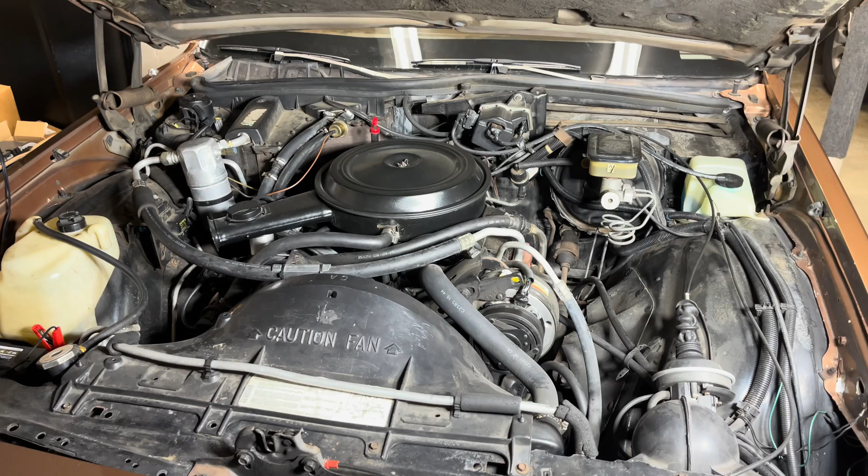Someone wants an overview and a walkthrough of the engine bay. This is our 1985 Caprice Classic, the small block V8 carbureted, the 305 V8 with the E4ME carburetor.

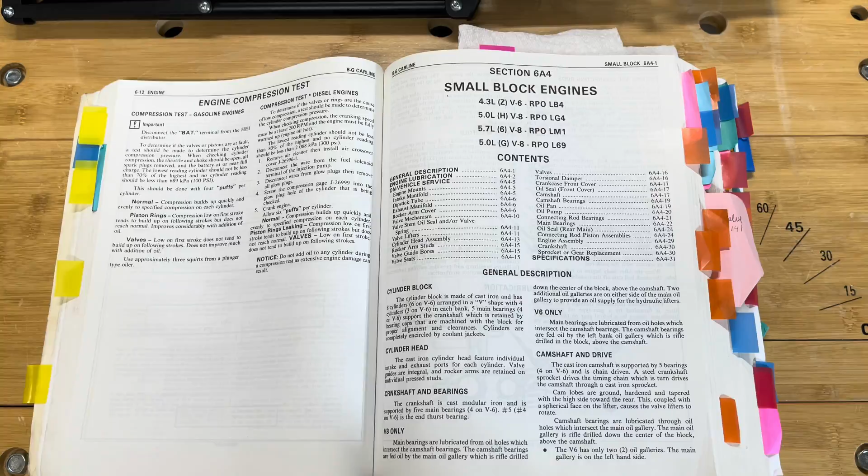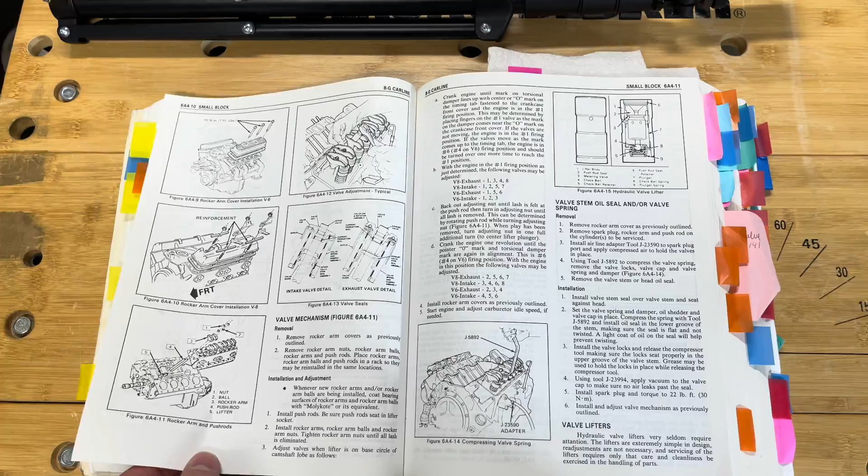I'll do a little walkthrough back and forth with the shop manual. The shop manual for the small block engine section shows the 4 engines available, and gives the general description of the mechanical arrangement, connections of the cylinders, the valves, and so on. If you have the diesel version of the engine, that's covered in a separate section.

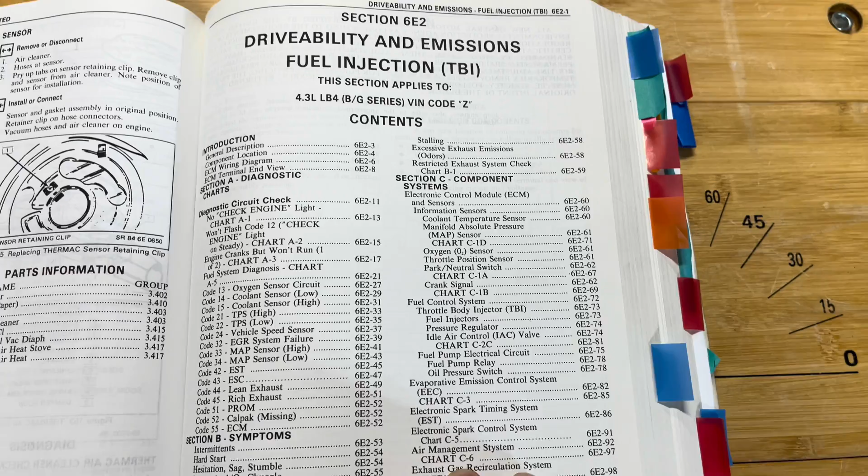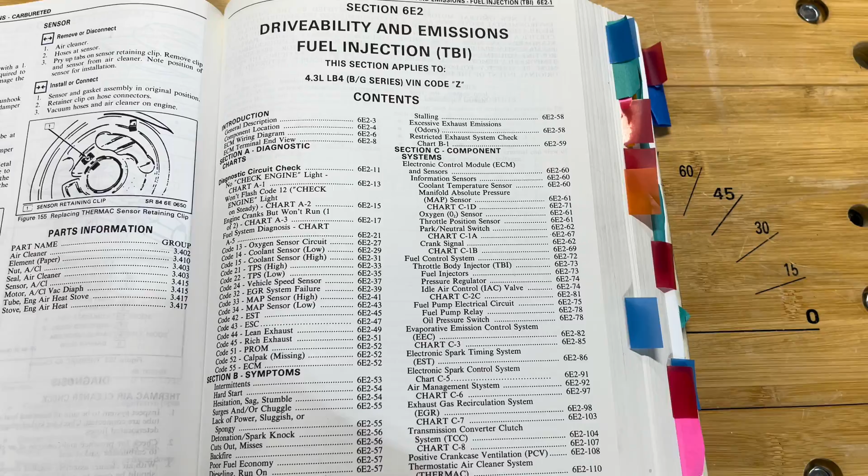There's a whole other section for the driveability and emissions for the throttle body injection, the early fuel injection version of the engine for the V6. I'm not going to cover that because that's not what's on my car.

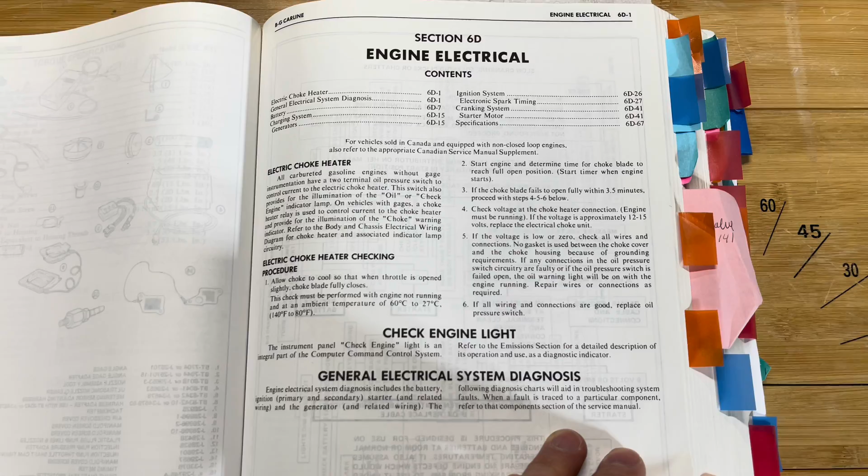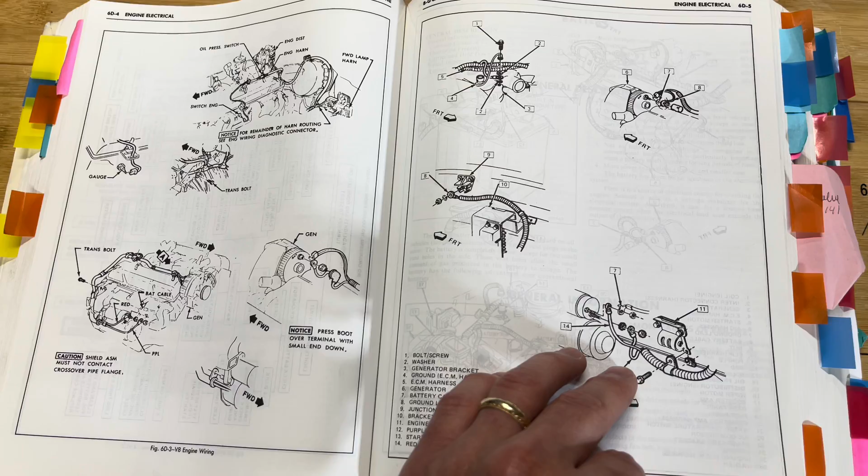Engine electrical can get tricky too, especially if you're trying to restore something and don't know what other people have done to modify it. There's a whole section on diagnosis of electrical problems for the engine, and some crude drawings of where all the wires and wire harnesses go. We'll take a look at this in comparison to our actual engine bay.

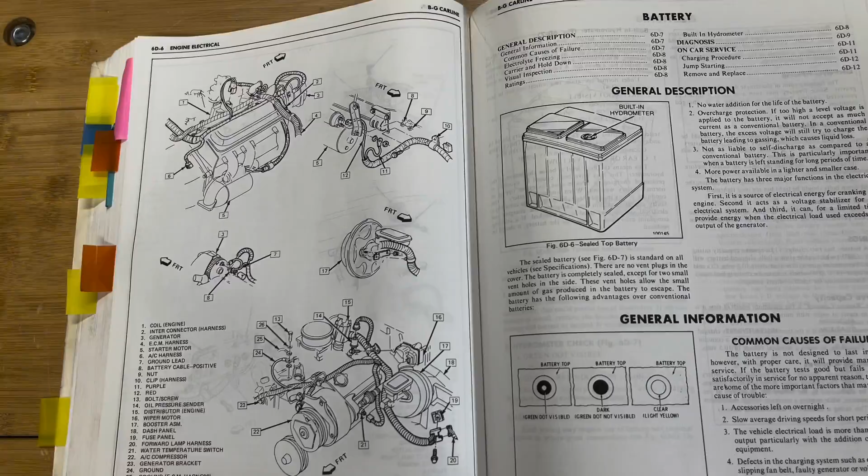To help us look at some of the wiring, I'm going to take off the air filter housing and flip it forward, exposing the carburetor here.

You can see the distributor back there. We'll do a very high-level overview because I don't know all the terminology for these parts, and honestly I have to rely on the shop manual whenever I need to do anything substantial. So let's have a look.

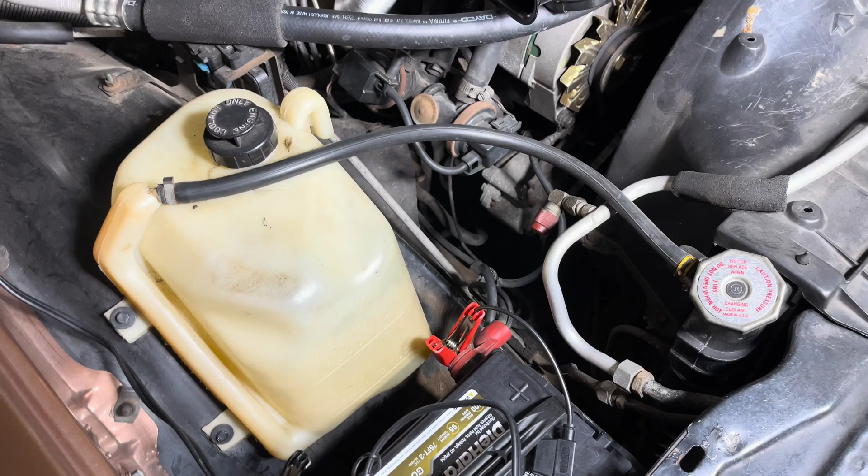I'll start over here by the battery. You can follow the connector to ground and over to the alternator and so on. I've got the wires here from the battery, and they connect in right down here.

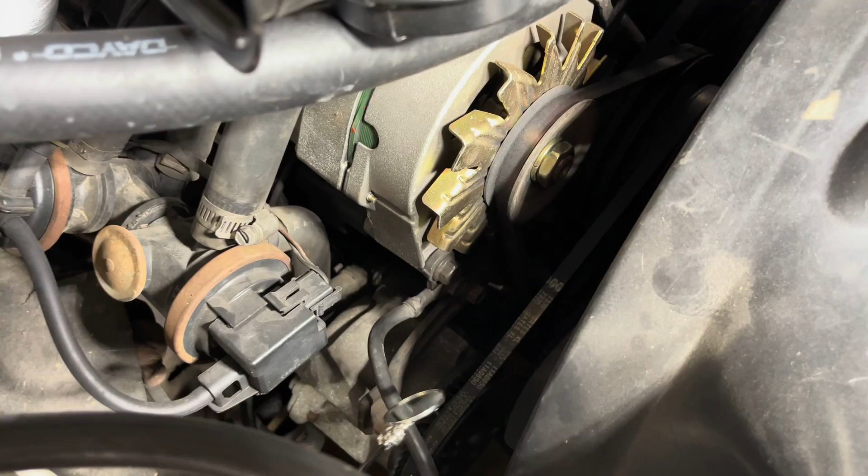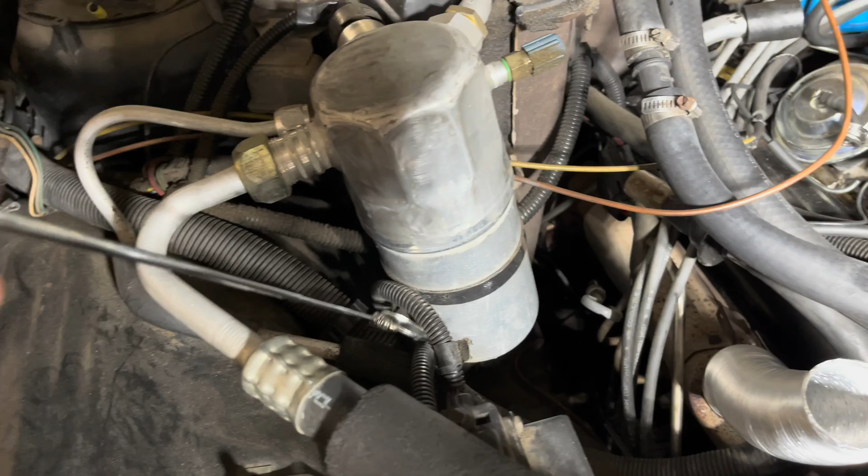We've got another large wiring harness up here that comes in from behind the heater core, goes down below the accumulator, up and underneath some of the hoses here, and splits right by the carburetor.

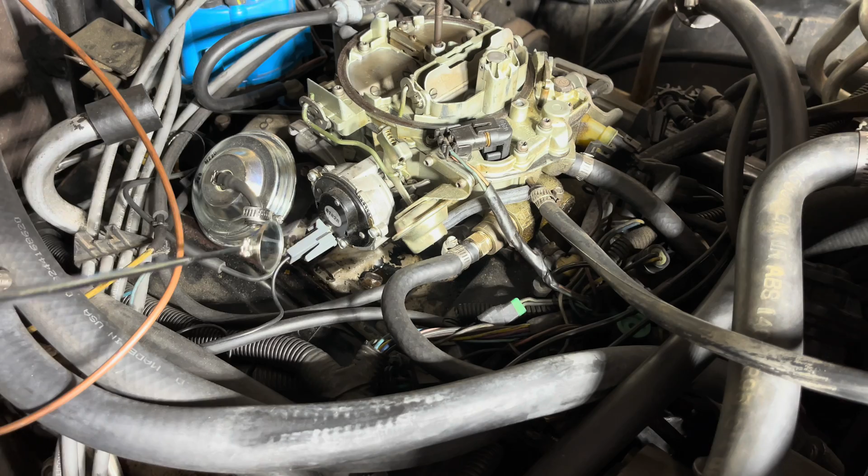You're going to have a couple of connections here for your carburetor. This side goes to the electronic choke. That's the EGR solenoid I replaced recently. Over here, you're going to have other connectors that come up and plug into the carburetor on top, and another one that plugs in on the side.

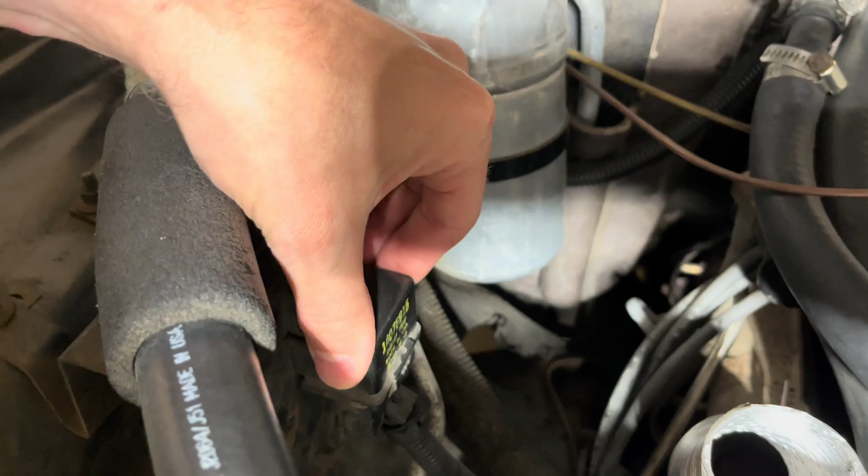Also coming in from behind the accumulator, you've got a harness that comes into your map sensor, your oxygen and pressure sensor, which then feeds up to the carburetor. This is important if you have the carburetor, to make sure the air-fuel mixture is right. So harness here, harness here, harness down here.

I think that's your thermostat. Here you have another sensor down here - pull these away so you can see. In the back here from your distributor, you can see 4 wires coming down, which go to the 4 spark plugs on this side of the V8.

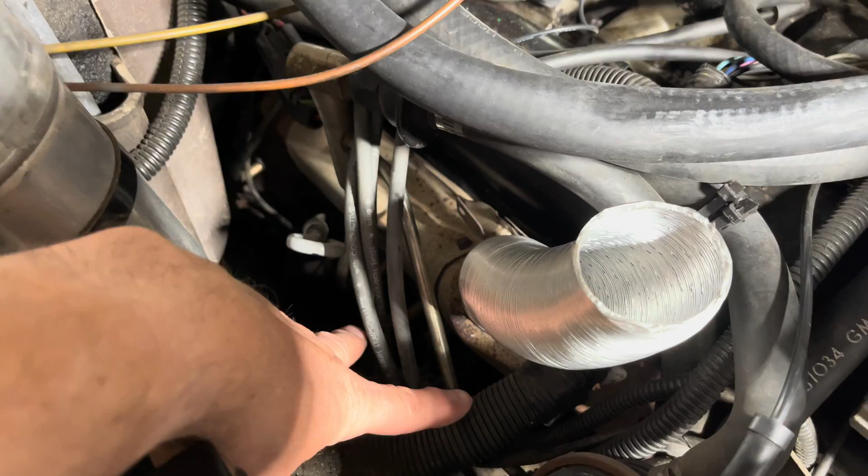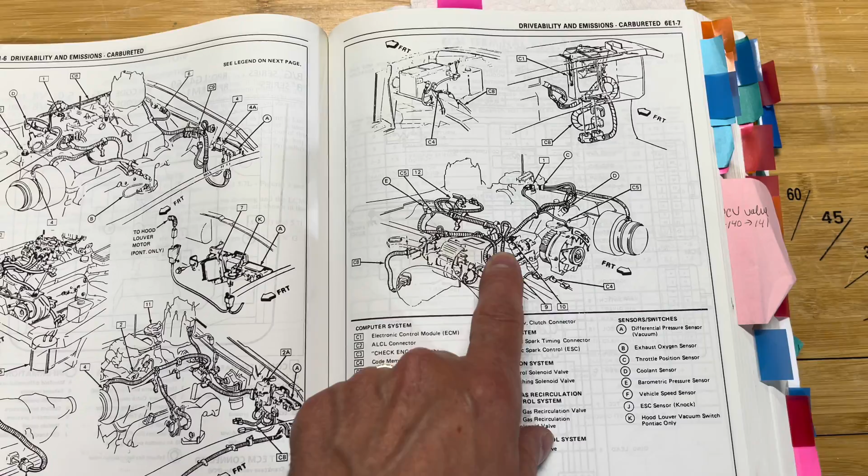Those wiring harnesses and connectors are basically shown here roughly. I'll zoom in - front of the car is here, generator, and you have your harnesses that come up to your carburetor and to your map sensor. This below is the code for what is what, so you could take a screenshot of that.

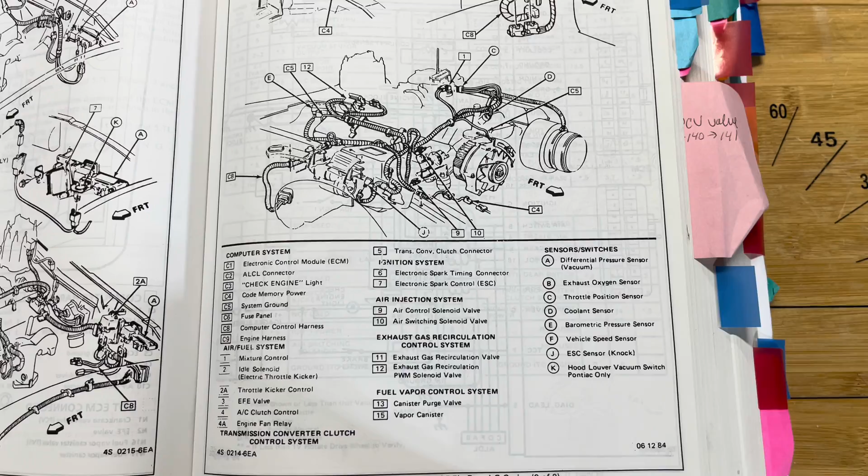Here's the other side - the front is towards the bottom left. Here on the other side of the carburetor, you're going to see 4 other wires coming off the distributor, going down here and coming underneath for the spark plugs on the driver's side.

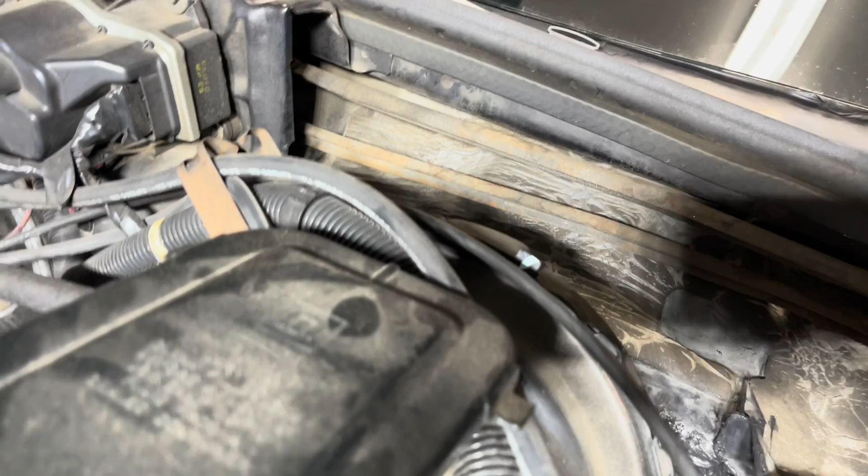You'll see here another harness section that comes across, goes underneath the washer motor and the windshield wiper motor, with a harness connection here and here. Then that continues on and comes underneath your master cylinder and goes in towards the dash there. The larger sheath itself comes up and over behind the master cylinder and then down to here.

You have this sheath here that comes up underneath along the fender, over the top of the fender, and then connects over for your cruise control, and that goes in here. You've got some vacuum valves and your vacuum reservoir here.

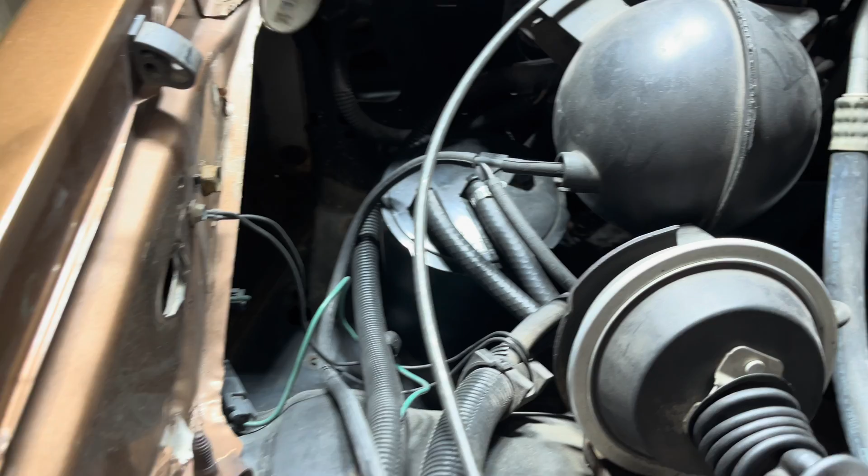Wiring also comes off of here and connects underneath here for a ground and I believe your horn, and then up to the back side of your lights.

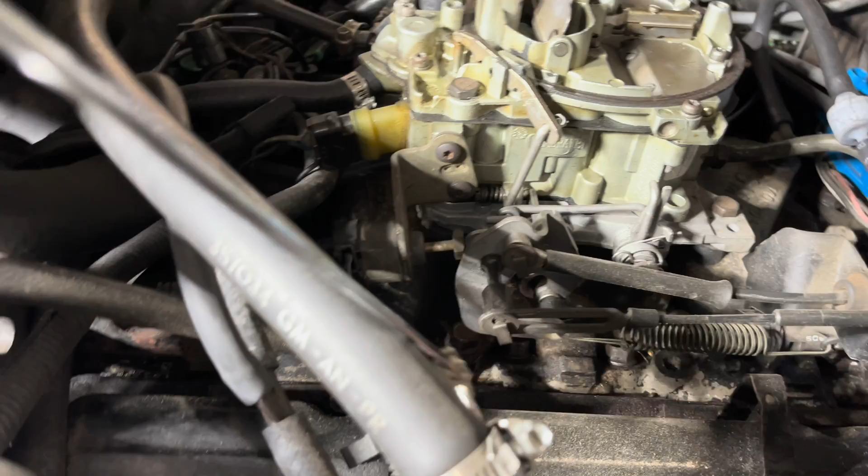Now coming off this side of your carb, there's that other harness I pointed to before. You've got wires that come down over the valve gasket cover, with a clip over this part of the exhaust manifold, going down to a sensor right down there. Also, if your engine has an AC system, you've got another conduit that comes across and connects up to your AC compressor.

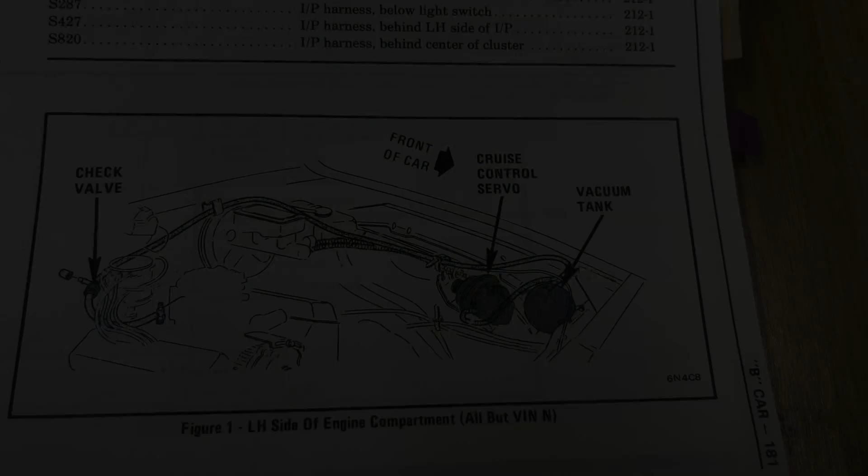Here's a close-up of what I just showed for the connections for the cruise control up to the front left or driver's side of the engine.

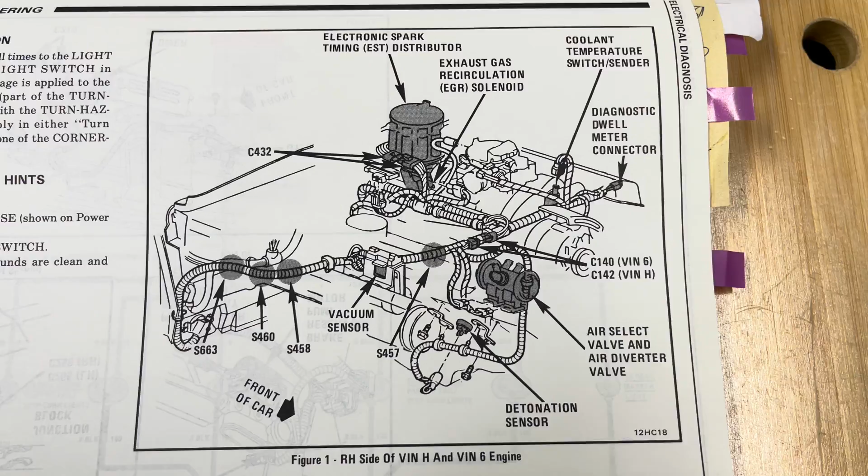Here's a diagram that shows a lot of the connectors related to the EGR solenoid, coolant temperature, spark timing, and vacuum.

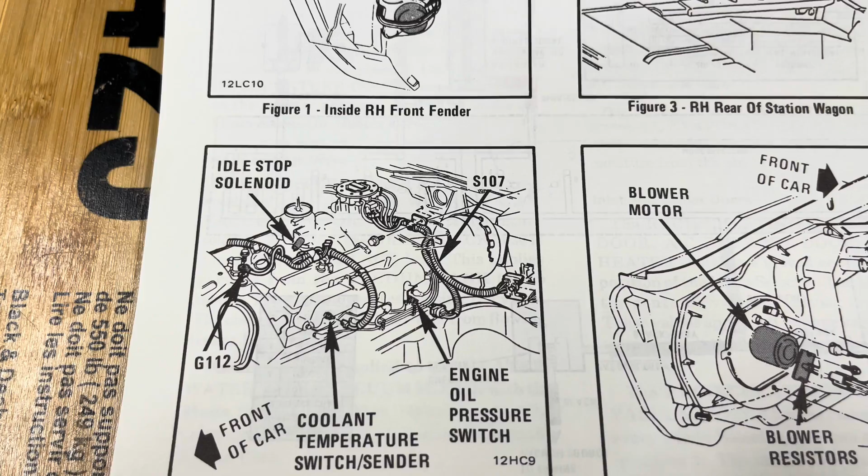Here's a diagram showing on the right-hand side of the engine, the front of the car's down here, where that oil pressure switch and coolant temperature connections are, as well as your idle stop solenoid.

Another diagram here, you can see the EGR solenoid, coolant temperature sensor, and so on.